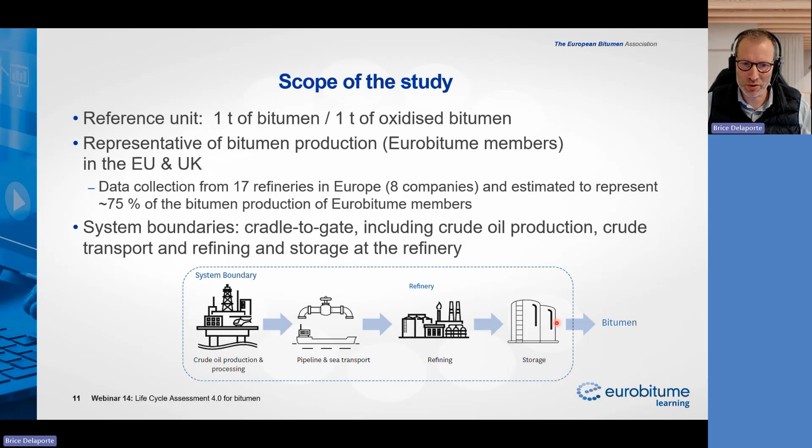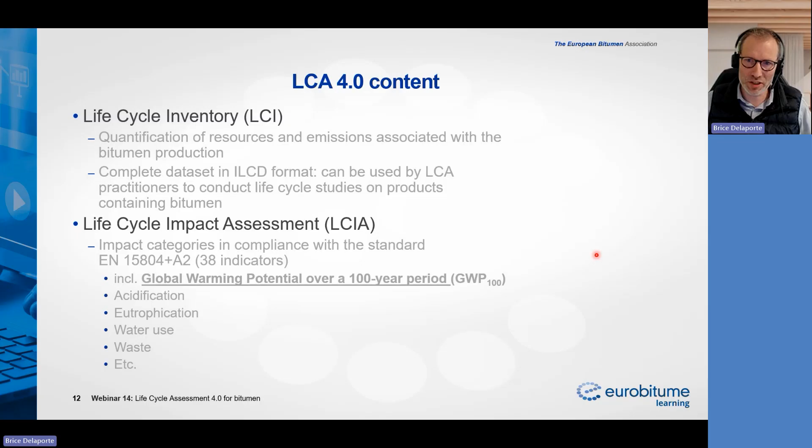The life cycle assessment study contains 2 results categories. First, what we call the life cycle inventory, LCI, which is a quantification of the different flows of resources and emissions associated with the bitumen production. And you can find in the full report the main flows of resources and emissions to air or to water, which is typically this table here.

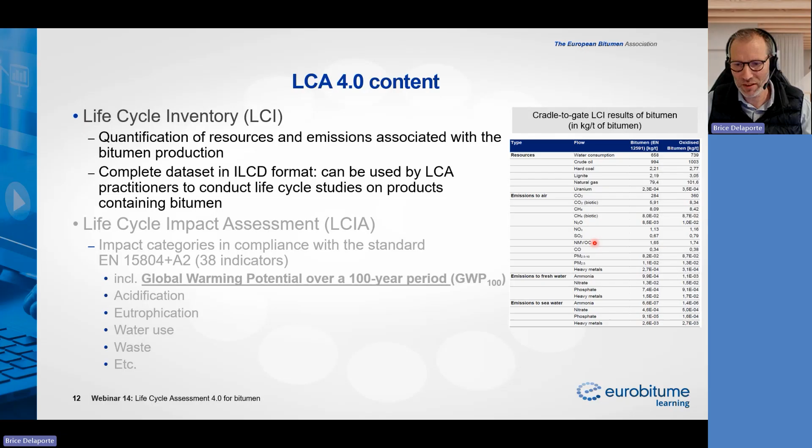And for LCA practitioners who would like to access the complete data set, you can download on the Eurobitumen website through a request form this data set in the ILCD format for International Life Cycle Data System, which is neutral and interoperable, which means that it can be used in the different LCA software programs. In practice, it's not so easy because the ILCD format cannot be directly imported in all the LCA software programs, but we are working on this issue. Anyway, for the moment, you can download the ILCD format through a request form on the Eurobitumen website.

The second result category is the life cycle impact assessment, LCIA, which is the transformation of the different flows in terms of emissions or resources into impact categories. And we decided to deliver these impact categories in compliance with the standard EN 15804+A2, which specifies 38 indicators, including, for example, indicators related to the climate change. So, for example, the global warming potential indicator. But you can also find the other indicators like acidification, eutrophication, water use, waste, etc. All these 38 indicators are available in the full report.

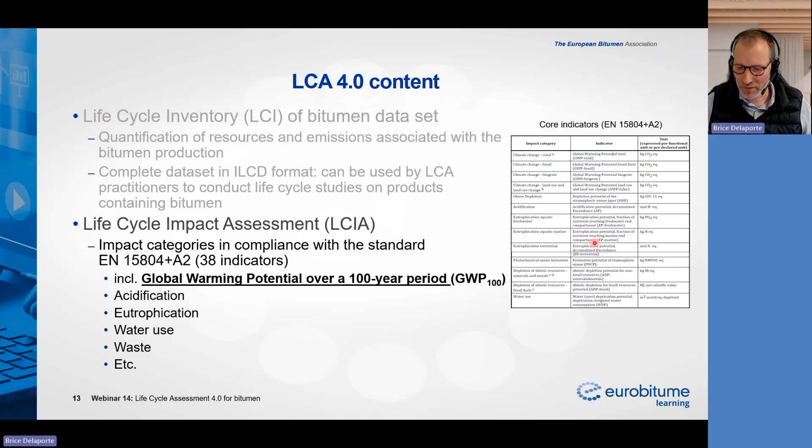In the rest of my presentation, I will mainly focus on the global warming potential indicator because it's the most widely used indicator, I would say, in practice, and especially, for example, in public procurement or in contracts between stakeholders. So I will mainly present results on this indicator in the rest of my presentation.

And this is the results of this global warming potential indicator for the two bitumen categories that I mentioned previously. So on the left part, you have the average bitumen. And the new reference number, as you can see, is 530 kilograms of CO2 equivalent per ton of bitumen. So it's basically the carbon footprint of the average bitumen. And as you can see, also the feedstock supply or the crude oil production represents the main part of this carbon footprint, around 70%. And the second most important stage in terms of carbon intensity is distillation processes, which represent about 14% of this carbon footprint.

On the right-hand side, you have the results for the oxidized bitumen. So typically for this kind of bitumen, we have an additional oxidation process at the refinery, which consumes energy and then has an impact on the carbon footprint. So typically this oxidation process represents around 14% of the carbon footprint of oxidized bitumen. And the total carbon footprint is 616 kilograms of CO2 equivalent per ton of bitumen. These numbers are significantly higher than figures available in the previous life cycle inventory, but I will come back later on this point to explain the differences.

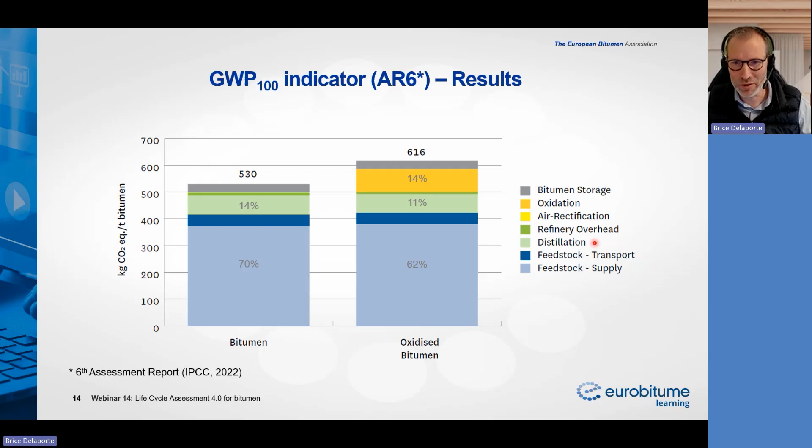And if we zoom in on the carbon footprint of the reference average bitumen, you see again this new number, 530 kilograms of CO2 equivalent. And you have the distribution of this number according to the different production stages here and according to the different greenhouse gases here. So once again, the crude oil production represents the main part of this carbon footprint, around 70%. And then in order of the carbon footprint intensity, you have the distillation processes, the feedstock transport, and the bitumen storage.

What is interesting on this chart is you can also see the effect of the different greenhouse gases. So in light blue, you have the CO2 emissions. In dark blue, you have the methane emissions, and you can see that the other greenhouse gases, including the nitrous oxide, are insignificant. So in the rest of my presentation, I will focus mainly on the methane emissions and the CO2 emissions. CO2 emissions represent just over half of the carbon footprint of bitumen, and methane emissions around 50%. What is interesting is at the crude oil production stage here, methane emissions represent the main part of this carbon footprint. So that's typically a new result compared with the previous study. And I will come back also later on this point.

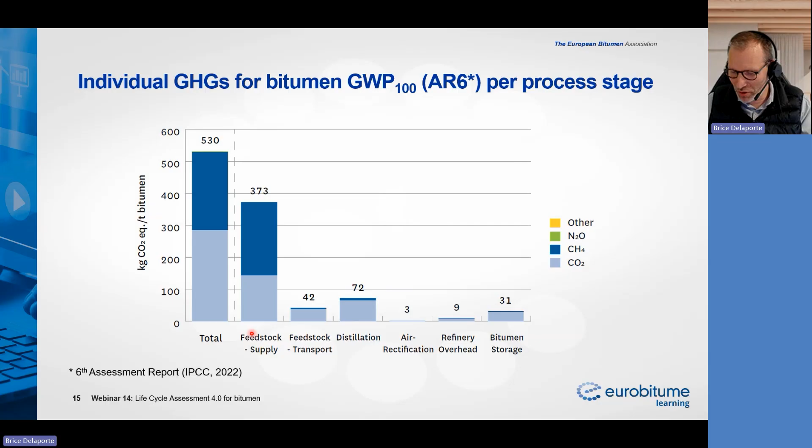Just to finish about the results, you have here on this chart the result regarding the eutrophication indicator. The idea is not to comment this kind of results, but just to remind you that in the full report, you can access the 38 indicators according to the different bitumen production stages. So typically this table that you cannot read on this slide, but which is available in the full report once again.

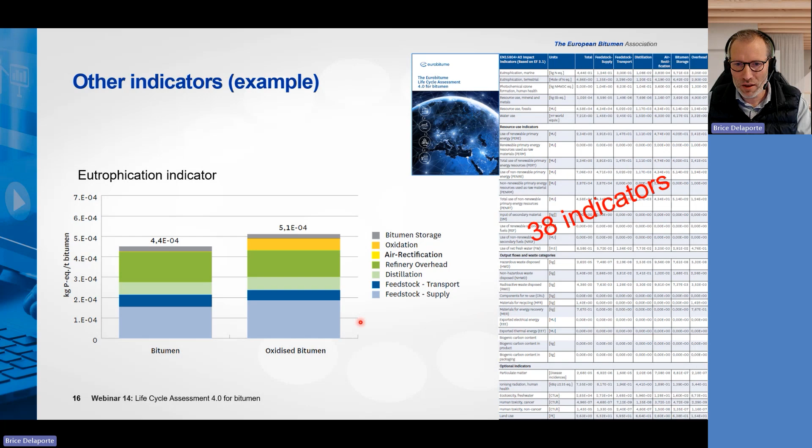So that's it for the first part of my presentation, and I propose now to move on to the next point, which is a comparative analysis with the previous study, and once again focusing on the global warming potential indicator. And on this chart, you see again the new numbers related to the new LCA study. So 530 kilograms for the bitumen and 616 for the oxidized bitumen.

And on the left-hand side, you have the results regarding the carbon footprint taken from the previous study, the LCI 3.1. And in this LCI, we presented two types of results corresponding to with and without infrastructure. What we call infrastructure is the construction, the maintenance, and the operation of the infrastructures used for the bitumen production. So, for example, the refinery, the wells, the ships, or the pipelines, etc.

And you can see that these infrastructures had a significant effect on the result. That was the observation taken from the previous study. In the new study, we decided to provide a single value for each bitumen category, one value for the average bitumen and one for the oxidized bitumen, because it was not so easy for the data users to choose which of these values, with or without infrastructure, to use for their own calculation. So in the new study, we have a single value. However, we addressed this issue of the infrastructure effect in the framework of sensitivity analysis, which is available in the full report and in the result.

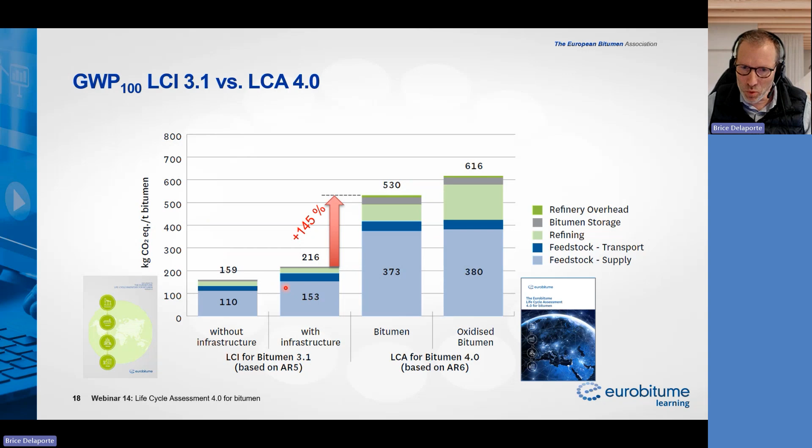What we observe, of course, on this chart is a very significant increase in the carbon footprint compared with the previous study, plus 145% increase if we consider the figure with infrastructure. So, of course, it is very important. And the idea of the next slide is to understand and to explain to you why we observe such a difference. And it's very important to understand that the significant change in the results is due to significant changes in the LCA assumptions and the methodology.

And that's why I present this table. On the left part, you have the main assumptions related to the previous study, the LCI 3.1, and on the right part, you have the main assumptions related to the new LCA study 4.0. And regarding the crude oil database, this is probably the change that has the biggest impact on the result.

In the previous study, we used the IOGP database, which is a database based on the geographical averaging by big regions, which I would say is not ideal because the variability of the carbon intensity of the crude oil within the same region can be very important. That's why we switched to another database in the new LCA. I can add that in the previous LCI, we used a 5-year averaging for the crude oil production, I mean from the year 2015 to 2019.

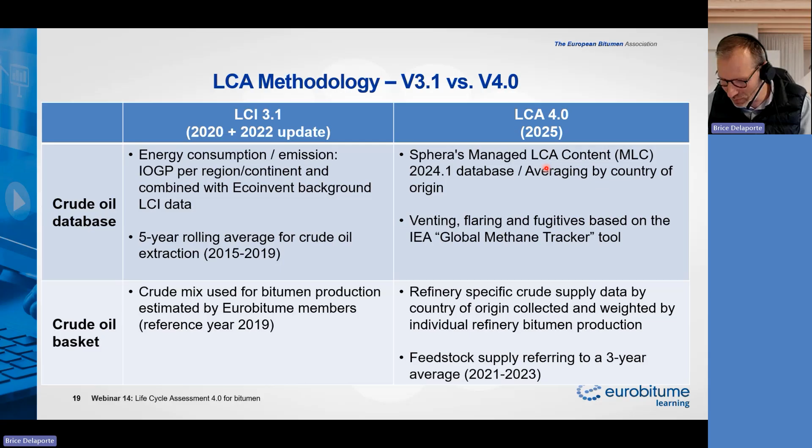We also changed the allocation method at the refinery. In the previous study, we used the sensible heat method, which is a theoretical calculation of the energy required to heat the bitumen from the crude oil temperature to the bitumen temperature. So basically an increase of around 150 degrees, and also taking into account that there is no phase change, so using basically the heat capacity of the bitumen. So once again, it's a theoretical approach.

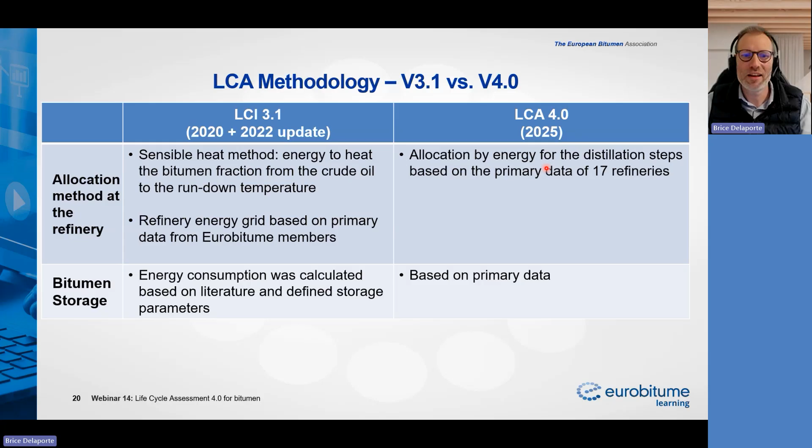In the new study, we are now using the allocation by energy, thanks to data collected from, as I mentioned, 17 refineries. So we had this data for the 17 refineries, so we could use the allocation by energy. And for the bitumen storage, it's the same idea. We are now using primary data from these 17 refineries, and in the previous study, it was more based on the theoretical calculation using storage parameters and parameters taken from the literature.

So if we come back to the impact of the crude oil database change, on this chart, you have the crude oil production stage in terms of carbon footprint expressed once again in kilograms of CO2 equivalent per ton of bitumen. On the left part, you have the results taken from the LCI 3.1, so 153 kilograms. And on the right part, you have the new result. As we already observed in the previous slides, we observed a significant increase. What is important to have in mind is the comparison is a little biased because in the new LCA, we use a different crude oil mix than in the previous LCI.

But anyway, on this chart, we still can have two main observations. First, in terms of CO2 emissions, the results are very close for both studies. And the main change is due once again to the way of accounting for methane emissions. So typically, this significant change is due to the change in the crude oil database, including taking into account the methane emissions.

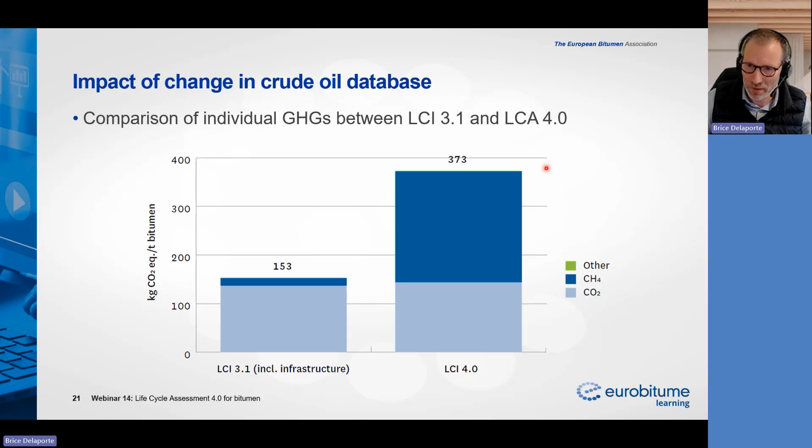If we look at the effect of the crude oil basket, once again, we cannot compare directly the new results taken from the study 4.0 with the previous study because the calculations were not carried out according to the same method and the same databases. That's why we propose to carry out a sensitivity analysis with 3 different scenarios. The first scenario on the left-hand side is the baseline scenario, which allows to obtain the new reference number 530 kilograms, and which is based on the averaging taking into account the evolution of the crude oil share over the past 3 years, from 2021 to 2023.

We considered another scenario taking into account the evolution of the crude oil mix over the 5 past years, so from 2019 to 2023. So you have this figure. It's presented according to big regions. It's important to have in mind that we collected data at the scale of the crude oil by country of origin, but for confidentiality reasons, it's presented only at the scale of big regions, but you have the evolution of the average crude oil mix over the past years. And for this scenario, we used 5-year averaging. And we also consider the last scenario, which is basically the year 2023, so only the last point on this figure.

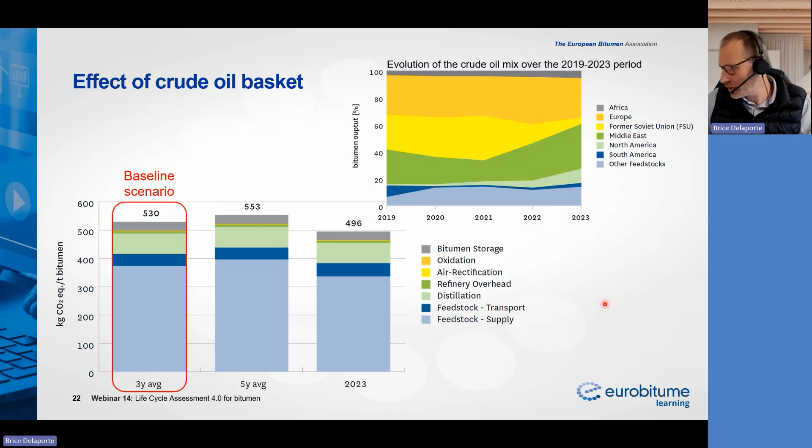Oh, sorry, I had this animation.

And finally, regarding the impact of the allocation method at the refinery, it's the same idea. We cannot compare directly the previous study with the new one because once again, they are not based on the same calculation and databases. So in the same way, we decided to present a sensitivity analysis in the study and in the report. It's available in the report. So we have this baseline scenario based on the energy allocation, which allows to obtain this number 530 kilograms.

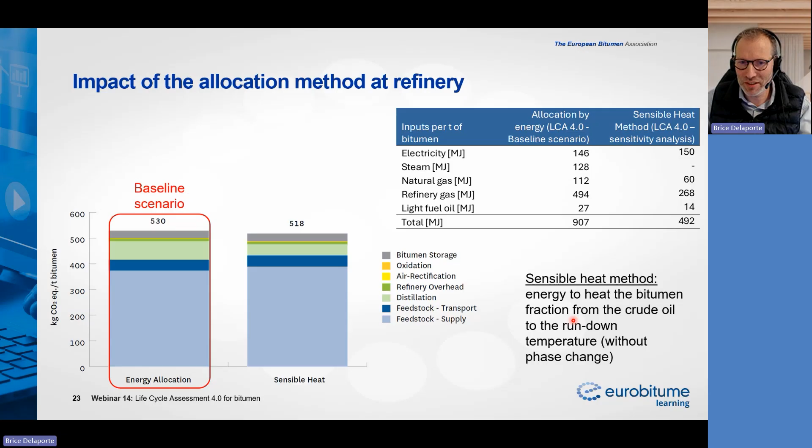And we made a calculation using the sensible heat method. So just to remind you that this method is a calculation based on the evaluation of the energy consumption to heat the bitumen from the crude oil temperature to, I would say, the storage temperature, and considering there is no phase change, so using only the heat capacity and the yield and the delta temperature between the output and the input. And so we obtain

this table here in terms of energy consumption with the sensible heat method, and this table here with the allocation method by energy. So if you look at the total result of the global warming potential indicator, you find that the difference is quite low, between 2 and 3%, so has no significant effect on the result considering the total carbon footprint according to the different production stages. But if you look specifically at the distillation stage, you can see that the effect is significant. I would say around 40% between the allocation by energy and the sensible heat method.

So, well, we are not questioning the sensible heat method, which is very helpful in many cases, but we preferred to use the allocation by energy for the baseline scenario because we typically have the primary data, and it was our choice to use this allocation method by energy because we had primary data available.

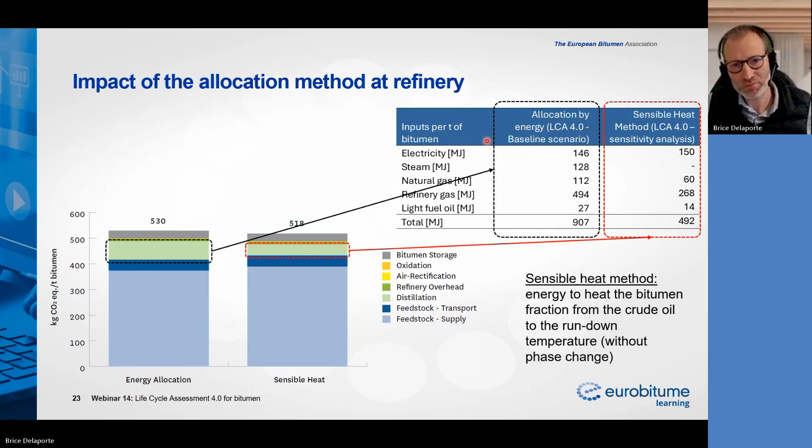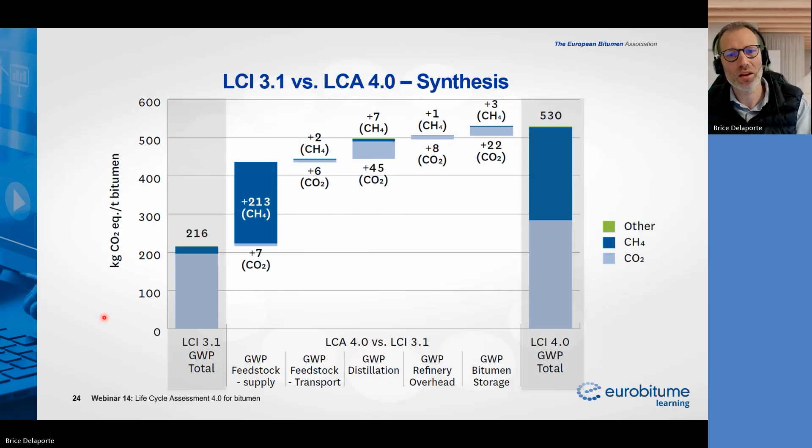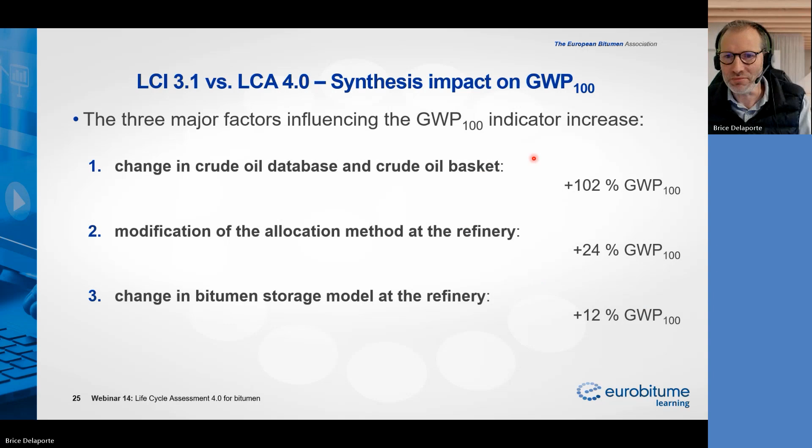And just to summarize with words rather than with a chart, the three major factors influencing the global warming potential indicator increase are the change in crude oil database and crude oil basket, which explains around plus 100% of the carbon footprint. The modification of the allocation method at the refinery, plus 24%, and the change in the bitumen storage model at the refinery, plus 12%. So that's it for this comparative analysis, and I propose you now to move on to the last point, which is the deliverables.

You can also download the LCI dataset with a dedicated web page with a request form on the Eurobitume website, which is a files package available in the ILCD format, which can be imported directly in most cases in your LCA software. But we are still working on this topic to make sure that our data could be imported in all the LCA software programs.